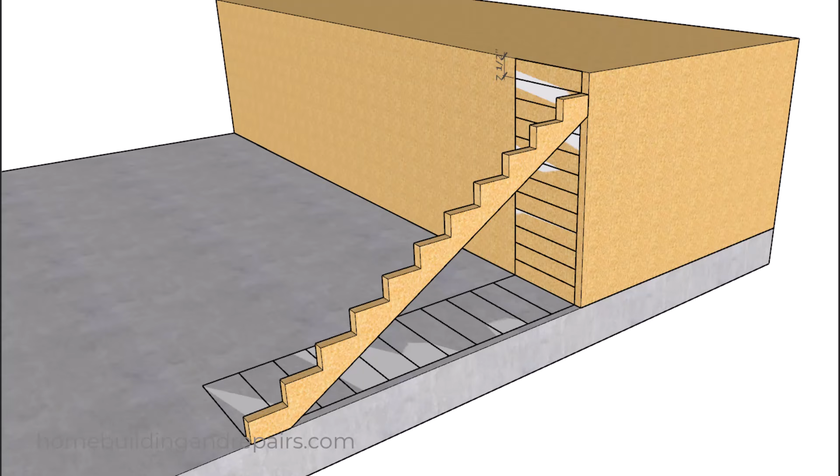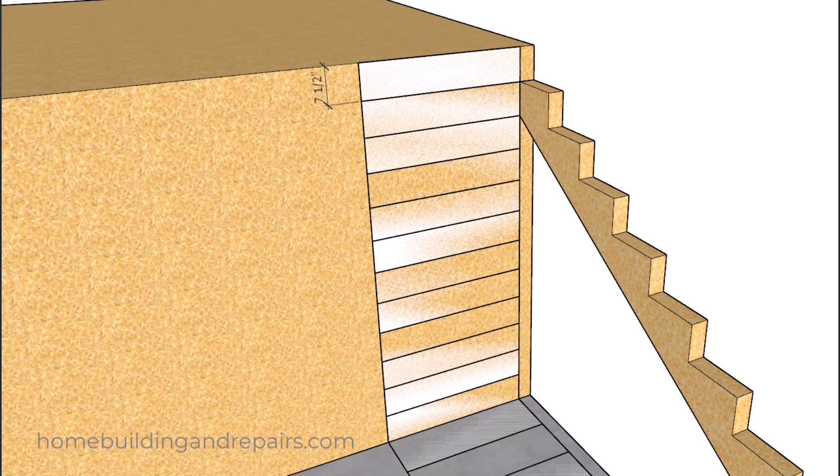I've waited a long time to make this particular video and was actually thinking about creating a book, which I still might, because in this video, I'm just going to provide you with the basics of how you can use a wood stringer that you can lay out to use as a pattern and a guide to calculate the location of the metal components you're going to need to build the floating staircase.

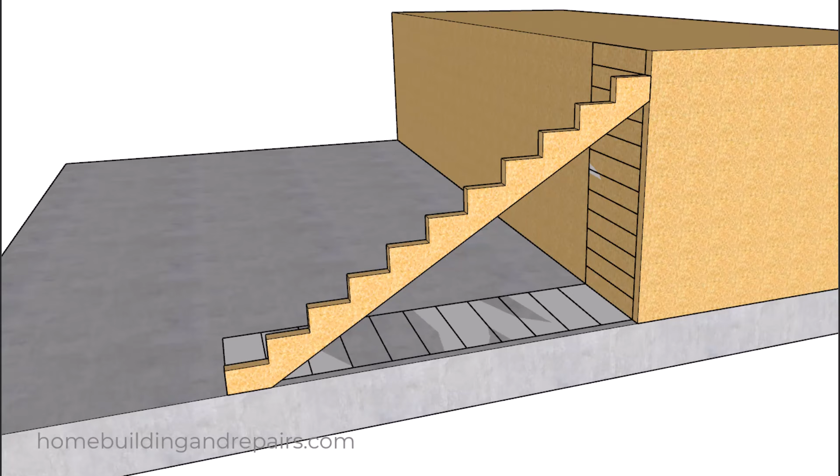And for those of you who can wrap your mind around what I'm doing here, you're probably not going to need the book. And for those of you who want some more information about this, feel free to let me know in the comment area, because I'm not 100% sure I'm going to do a book on this, because I wouldn't be able to provide anybody with the structural engineering on it.

And you can take your tread sizes and lay them out individually on the stair stringer, and then either grab the support beam you're going to use, whether it's going to be wood or metal, and then position it where you want it. Now, you don't need to have it tight up against the treads like I have it here. And if it's going to create a problem, then you might be able to raise it, but for sure you're going to be able to lower it.

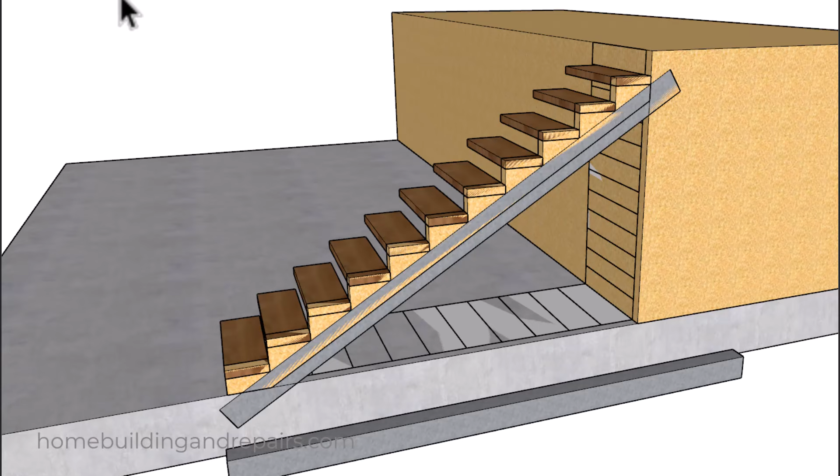It's just if you lower it, you might be using more materials. For example, you're going to need more metal to build the brackets here. So not too difficult. You can see where I spaced out these stair treads evenly. And I'm not suggesting you need to do this at all, because you're going to be able to use your pattern as the guide to make all of the necessary cuts you need to build this stairway.

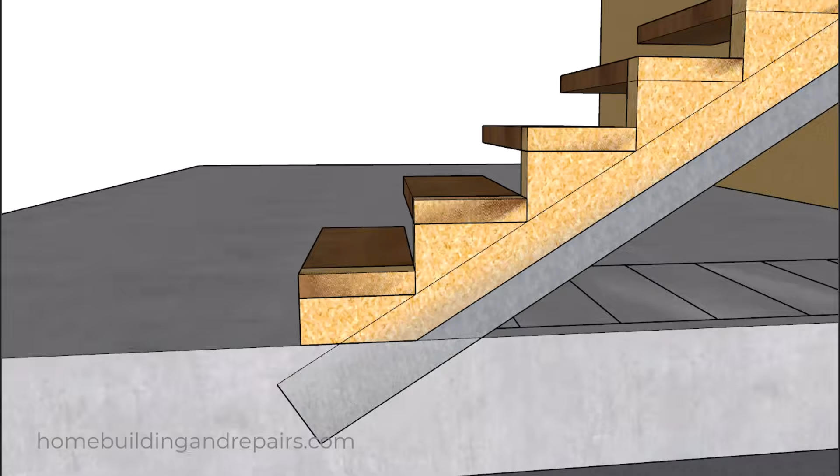And again, I will not be able to provide you with any structural engineering advice, any beam sizes, metal bracket sizes, or tread dimensions, or even structural connections that you're going to need at the bottom of the stairway. Maybe a thicker concrete footing with some heavy-duty anchor bolts, or some type of a structural post to connect the top to. However, you can probably get those by examining some other stairs that have been sold or that are currently being sold on the internet.

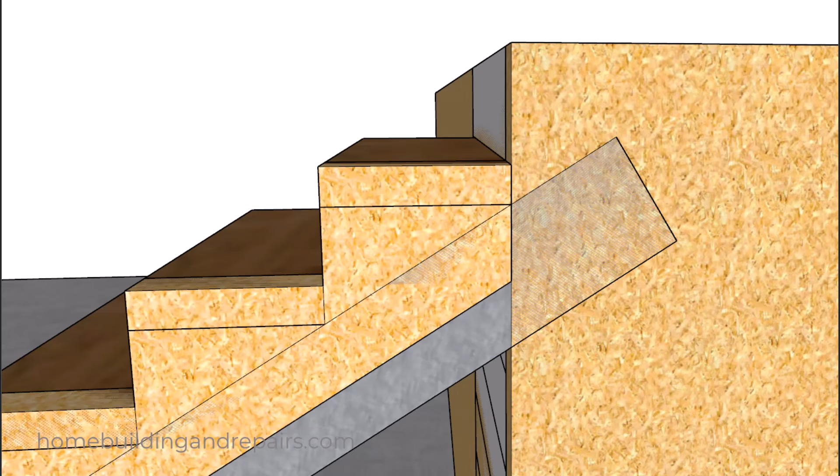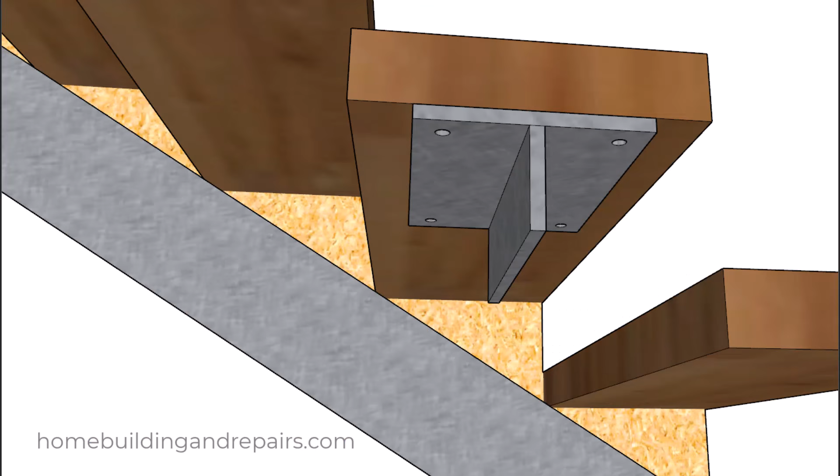And one of the reasons I have the beam up against the back of the tread is to provide a little more structural support to prevent it from moving. And then, of course, you're going to have a bracket like this. And you'll just simply slide that into place, measure what you need so that you can weld the bracket onto the beam. And of course, we're not going to weld it like this. We're going to position both of these in the center of the stairway.

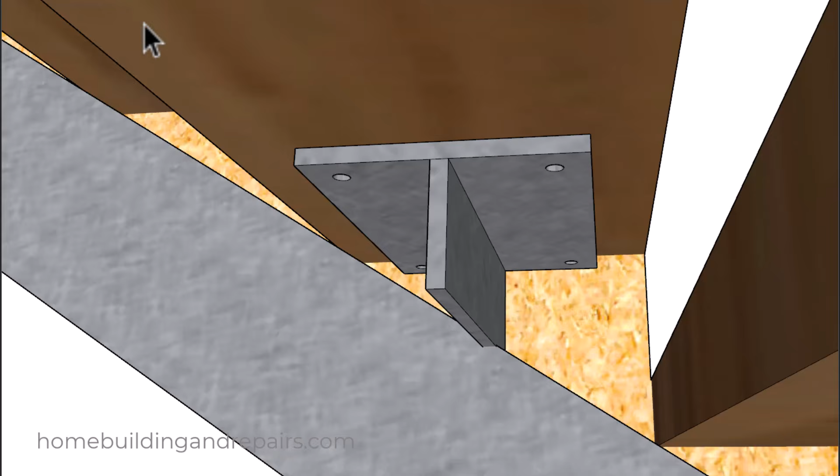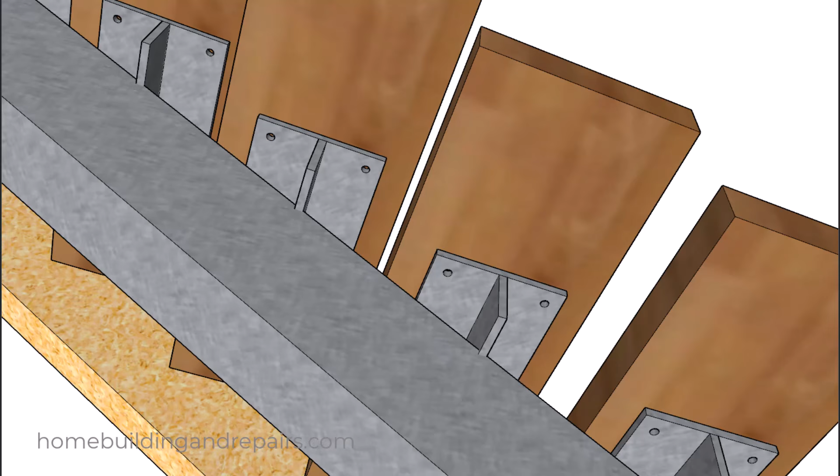So let's go ahead and reposition everything so that you can see what the stairway looks like when all the components are cut and welded together. So again, center of the stairway, and the brackets are welded on. And then you can go ahead and bolt the treads to the brackets. And I don't know if carriage bolts would be the answer there, or if you would use lag bolts.

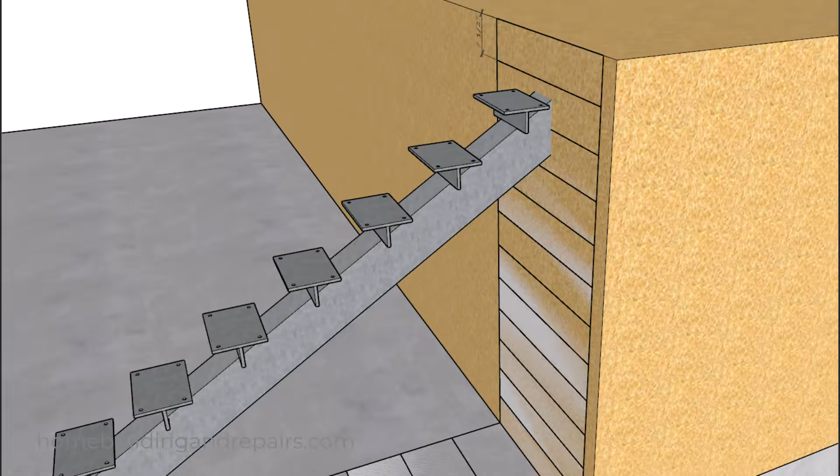And don't forget to look at this as something like a conceptual roadmap, not a guaranteed build plan. Because again, I'm not an engineer, so before you build anything like this, I would suggest taking these ideas to your local building department to make sure they pass code in your town.